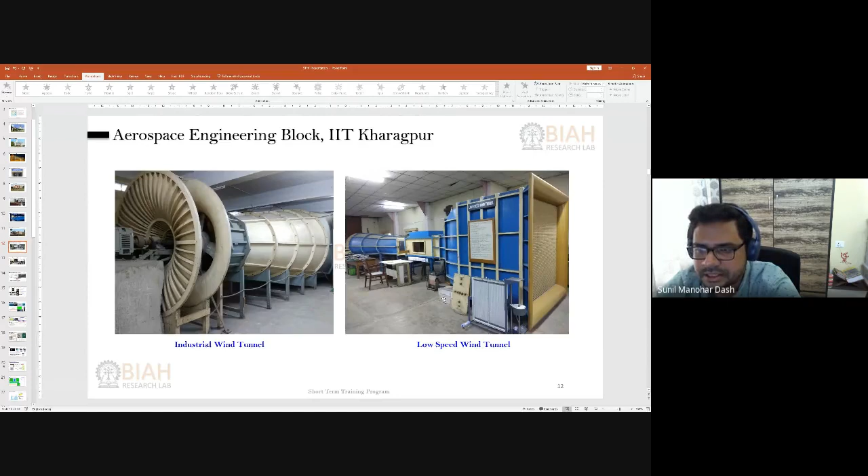Apart from that, we also have a low speed wind tunnel where we mostly carry out UG labs as well as a few low speed aerodynamic experiments. We also have a PIV setup to carry out experiments and flow visualization using the PIV technique - particle image velocimetry - where we try to visualize the flow field using laser technique.

We also have a high Mach number wind tunnel facility where we can observe supersonic flow, and this facility has been there for more than 30 years already. We do supersonic experiments and measurements on this.

My research team has recently developed this water tunnel facility in IIT Kharagpur, which can be used for various MAV and AUV applications - MAV being micro aerial vehicle and AUV being autonomous underwater vehicle. The tunnel facility itself is quite good, with turbulence intensity level less than 1.5% and uniformity more than 99.5%.

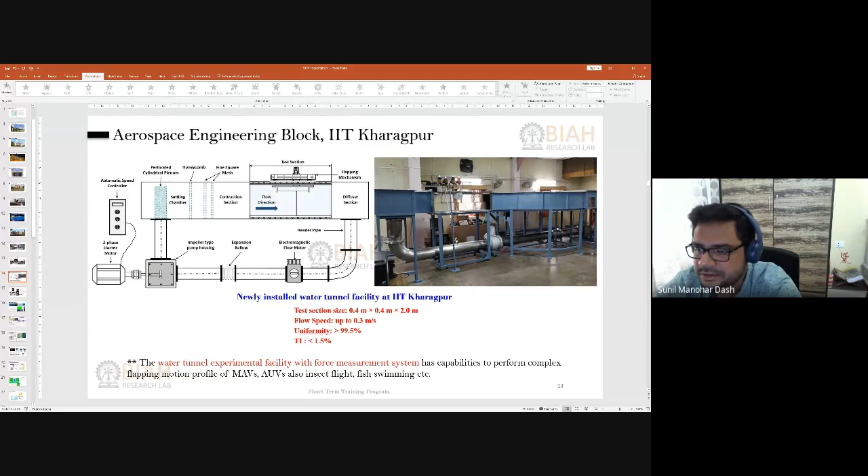We already have some experiments started here. This is a recent addition to the lab. And this is about the Bio-Inspired Aero Hydrodynamics research lab.

The principal investigator is here. We have several research students, PhD scholars, as well as master's and JRF students. We also have eminent professors as our research collaborators, like Professor Michael Triantafyllou from MIT, USA, Professor Pablo Valdivia from SUTD Singapore, and Professor Lua Kim Boon from NCTU Taiwan. There are a few more eminent professors currently working with our team.

So, the major thrust areas that we are working on.

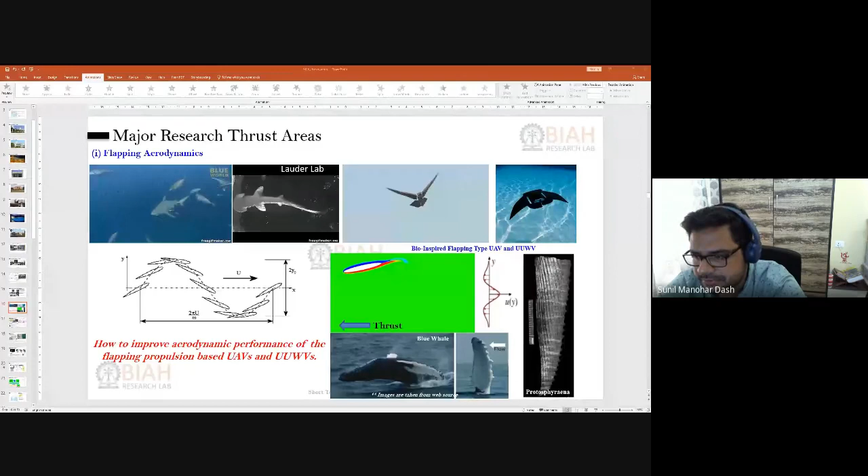One of the major thrust areas we are working on is flapping aerodynamics. We are looking at how we can develop autonomous underwater and aerial vehicles using bio-inspired principles, following the biomimetics of natural swimmers like different types of fish, and natural flyers like birds or insects. We are trying to develop different types of MAVs and UAVs using their locomotive principles, and find out how we can enhance propulsive performance by considering different aspects, such as different fin shapes and different perforations on the leading edge and trailing edge, to see whether they are beneficial to us or not. Those are the areas we are currently investigating.

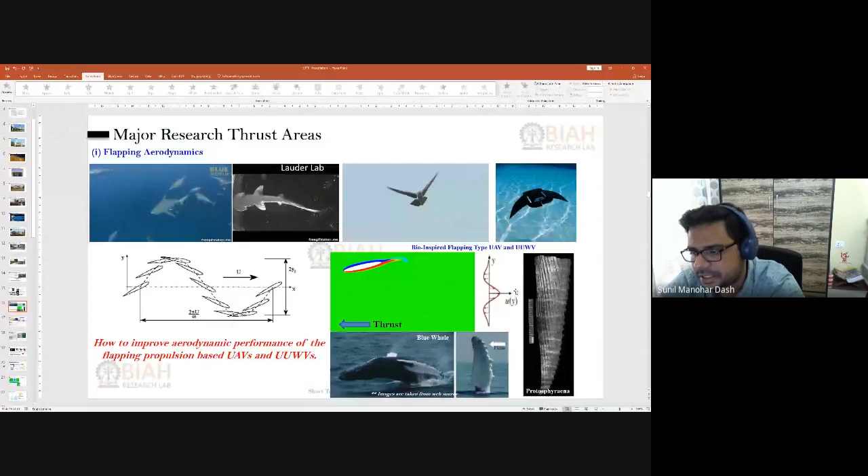Apart from that, our team is also looking into bluff body aerodynamics. As I mentioned, bluff body aerodynamics is one of the key areas that many professors are working on in the aerodynamics lab in the Department of Aerospace Engineering. Here we are looking at two main aspects. One is to characterize the flow physics behind different types of bluff bodies, starting from vehicle shapes like trucks or cars, through to traditional shapes like square cylinders and circular cylinders.

The second aspect we are looking at is how we can control this unsteady wake structure. You may already be aware that when there is vortex shedding behind a bluff object, it may lead to fluctuating forces, and due to this force fluctuation, the structure may vibrate. This is one example of vortex-induced interaction that previously led to a bridge collapse, which is already well known—most of you might have seen this video. This is the Tacoma bridge collapse, which happened due to unsteady flow patterns in the downstream.

So one area we are targeting is how we can avoid this unsteady flow pattern by providing various active and passive control measures. We are looking at different active control measures, such as compliant surfaces and moving compliant surfaces, as shown here, and also rotating cylinders. For these applications, we are considering both computational fluid dynamics and experimental fluid dynamics. Instead of going into the details of solver development, I am focusing on different aspects of the application of CFD that suit the current program.

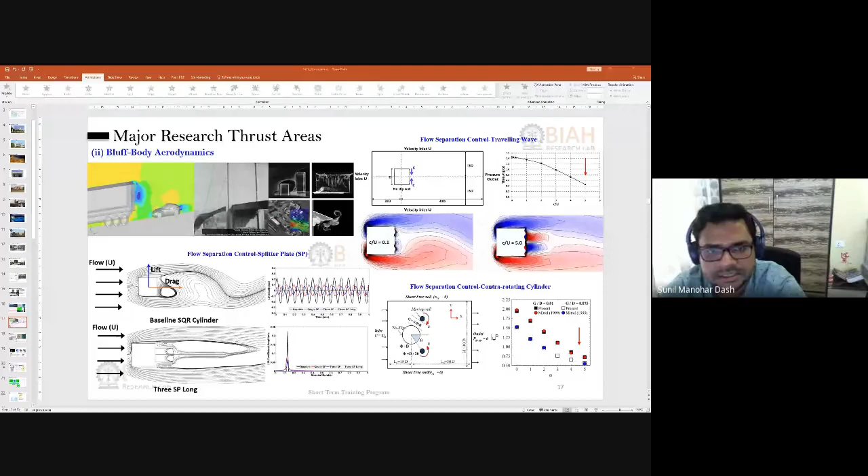So what is the uniqueness here? You can consider this simple problem statement. If we have the object moving...

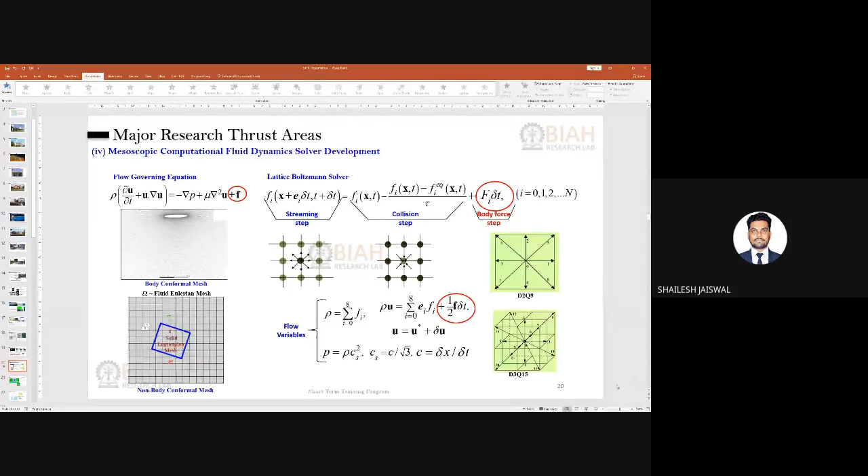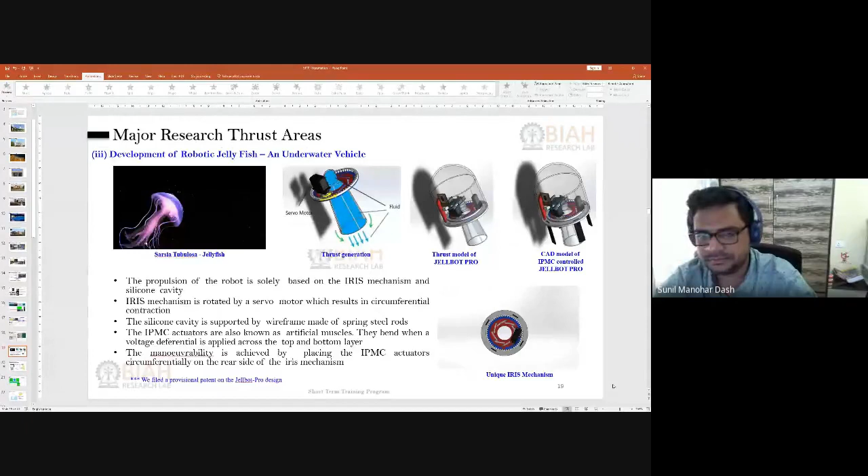So we are developing new CFD solvers. This is basically a mesoscopic solver. You must be knowing about Navier-Stokes solvers, which are macroscopic, where the continuum assumption is valid. In mesoscopic, also the continuum assumption is valid. But why are we developing this alternate solver? It has a specific advantage for moving boundary type problems.

For example, if I consider an object moving in a fluid domain, like this aerofoil oscillating in a domain, I need to change my mesh every time it moves. Because of that, all the results need to be projected to the new mesh at every time step, which is very time consuming and may require higher computational resources and time. To avoid that, we are developing an alternate solver where we fix the fluid domain and just move the solid domain, as shown here.

Instead of solving the Navier-Stokes equation, we solve a different particle-based equation called the Lattice Boltzmann equation, derived from the Boltzmann solver. Here we represent the fluid in terms of fluid particles, taking the average of the fluid particle density, defined as F, and we try to see their streaming as well as collision.

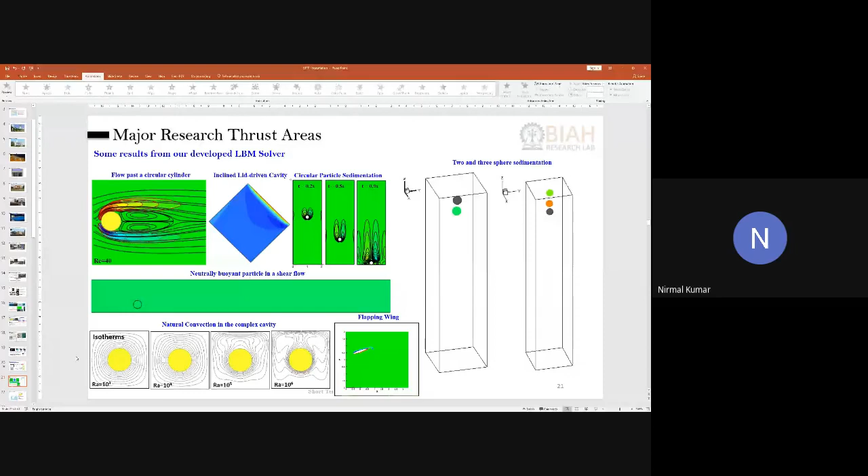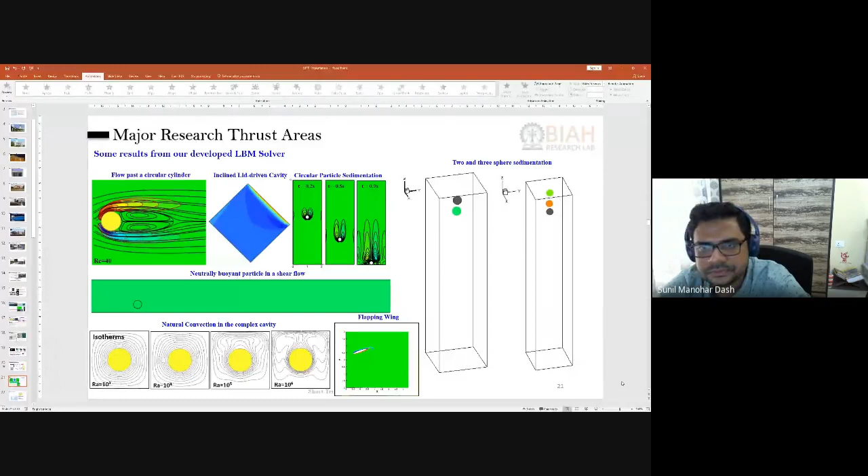So these are some of the results, properly validated with the previous data.

Now coming to the present talk, which is on the investigation of the propulsive performance of 2D flapping aerofoil. Let me give you a brief idea why we need this particular study, and what is the motivation behind us carrying out this research. You can see that on the Indian map, the Indian coastline is spread across more than 7,500 kilometers.

You can see that it's a quite large coastline. So in order to claim and hold and utilize the ocean properly, and for security reasons as well as condition monitoring in this particular area, we need highly efficient autonomous underwater vehicles.

There are various autonomous underwater vehicles already designed, but what we are looking for is how we can improve performance in terms of efficiency, and whether we can provide any new way of designing underwater vehicles based on the investigation or data we obtain. That is our objective behind this particular study.

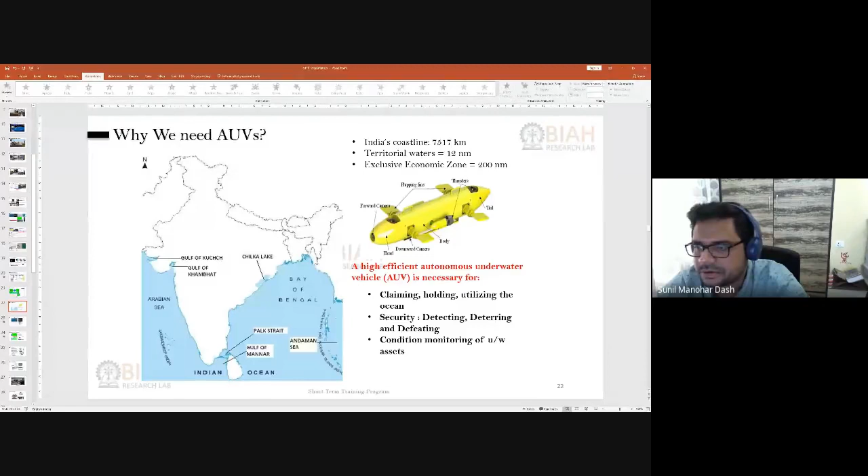As I have mentioned, the design of the underwater vehicle is inspired from fish. For example, here you can see the GIF file, showing two fish: one is a shark and the other is a hammerhead shark. They actually achieve propulsion based on flapping of their tail fin.

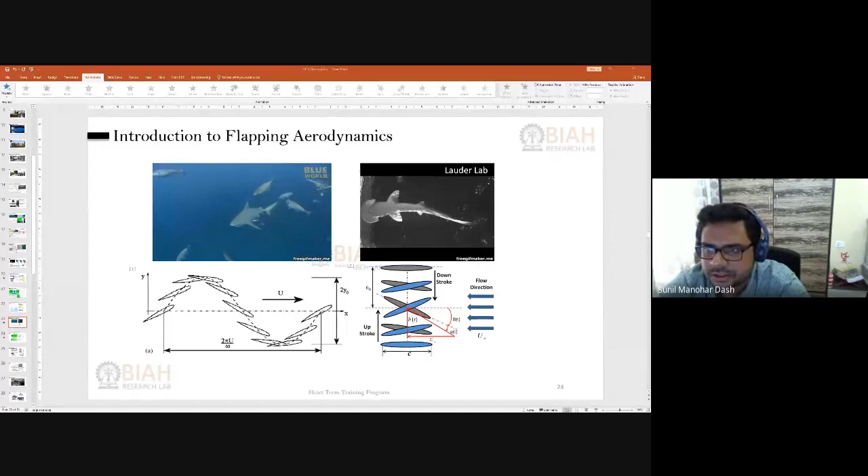This flapping of the tail fin can be seen in a sinusoidal manner, as shown here. If I take a cross section of their tail fin, it will actually look like this - basically a form of an aerofoil section. As it moves forward during swimming, it will also have some angle to the direction of its motion, as well as propagating in a sinusoidal manner.

If I change the frame of reference to a stationary frame, I can fix the location and simply oscillate the wing with some angle. So it is oscillating and having some angles, and these two types of motion are considered as heaving and pitching motion. When the aerofoil is pitching at a certain angle, that is called pitching motion. This simple vertical motion is called heaving motion.

We are investigating this in this particular study. I will just talk about this two-dimensional aspect of heaving and pitching motion of this aerofoil.

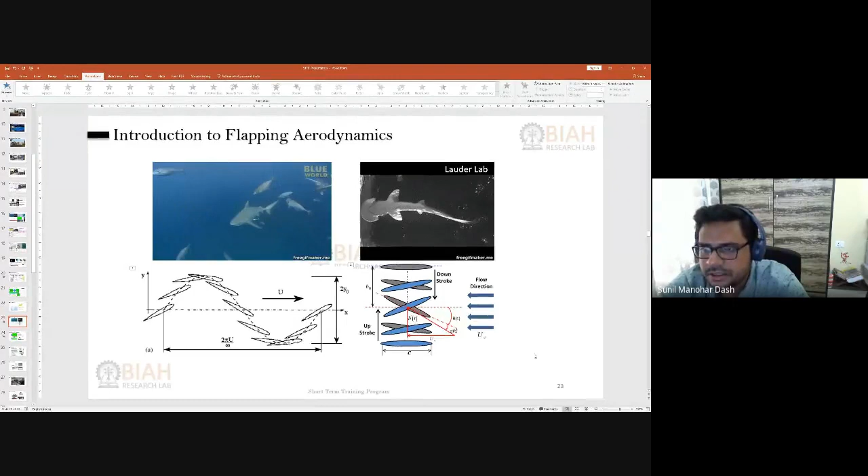Now coming to why the aerofoil generates thrust - I have considered two different objects here. One is an elliptic aerofoil, and one is a circular cylinder. If I go to full screen, you can see that this elliptic aerofoil produces a vortex street, which is a reverse Kármán vortex street.

If I do averaging in the wake region, it will give me a momentum excess type of velocity profile, and this momentum excess velocity profile will generate a jet-like structure. So on average, there will be a jet-like structure behind the aerofoil, and due to the action of this jet, the aerofoil gets a reactive force that propels it in the forward direction.

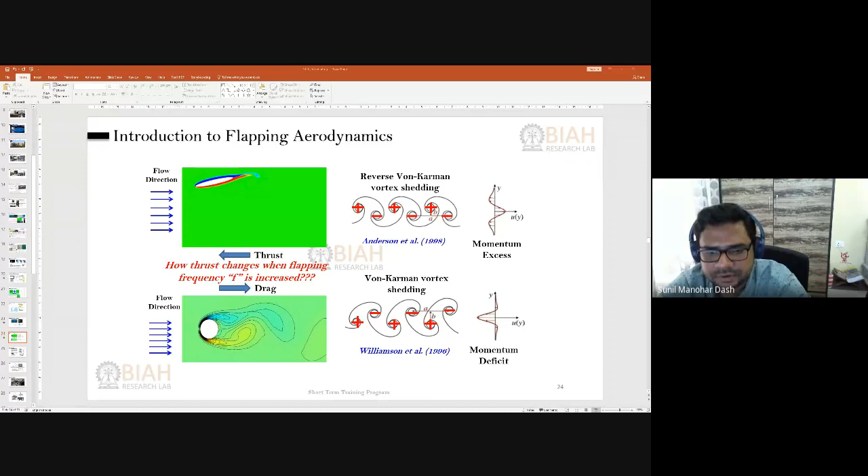That leads to thrust generation on the aerofoil. This is different from the conventional type of vortex street, which is the von Kármán vortex street, where you see drag-producing kind of nature. The significant difference between the vortex streets is shown here - this is reverse von Kármán, and this is the von Kármán.

If I take an average of the velocity profile in the wake region, you can see it will form a momentum deficit kind of situation, and because of that, the whole cylinder will be dragged into the wake, producing drag on the cylinder. Whereas in the other case, there will be thrust, so the aerofoil moves forward against the direction of the flow, but this will be drag. So that is the basic principle behind how propulsion can be generated using a flapping aerofoil.

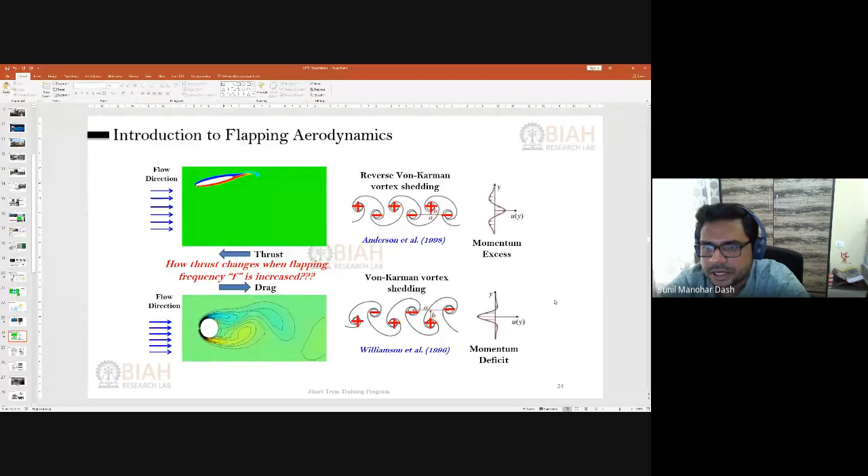Now coming to the problem statement - what we are trying to investigate here is how the propulsion performance can be improved if we consider different parameters, like various angles of attack and various propulsive performance based on different flapping frequencies. I have mentioned the flapping frequency in a non-dimensional form - the Strouhal number. If I vary it from 0.1 to 0.8, how does the propulsion performance change?

The Reynolds number in this particular study we have kept as 5000, because in this range mostly you see that MAVs and UAVs operate. And here we are considering the aerofoil movement.

The movement is in a sinusoidal manner - this is sinusoidal heaving, and this is sinusoidal pitching, which is also sinusoidal. This gives the effective angle of attack, since the aerofoil is moving in the vertical direction and there is an incoming flow, resulting in a resultant velocity, and the resultant angle is called the effective angle of attack. We keep the maximum effective angle of attack as 10, 15, and 20 degrees.

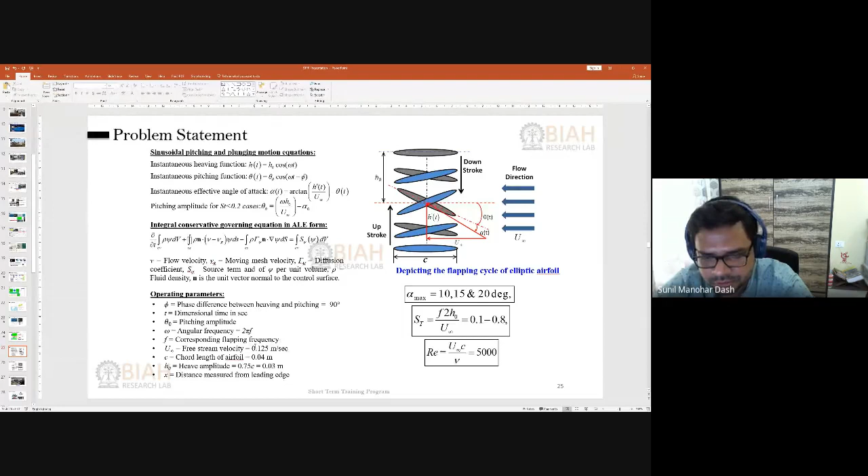We are going to solve this problem using a commercial solver - here we have used ANSYS Fluent, and in ALE formulation we are going to solve this one. These are a few parameters that we have set, though not so important at this stage.

Coming to the research methodology, we have divided the whole computational domain. We have taken an O-type computational domain - this is our inlet side, velocity inlet, the outlet is pressure outlet, and we have an interior domain with two interfaces defined which slide over each other. The inner domain slides over the outer domain, and also moves vertically as well as rotates.

If I show you the mesh motion, it will be like this. The boundary condition we have used is no slip on the surface of the aerofoil, and we have generated a structured mesh around the aerofoil using the dynamic mesh technique.

There are a few dynamic mesh parameters also we need to input in the Fluent solver, and we have written our own in-house UDF to generate this particular type of flapping motion, heaving and pitching motion.

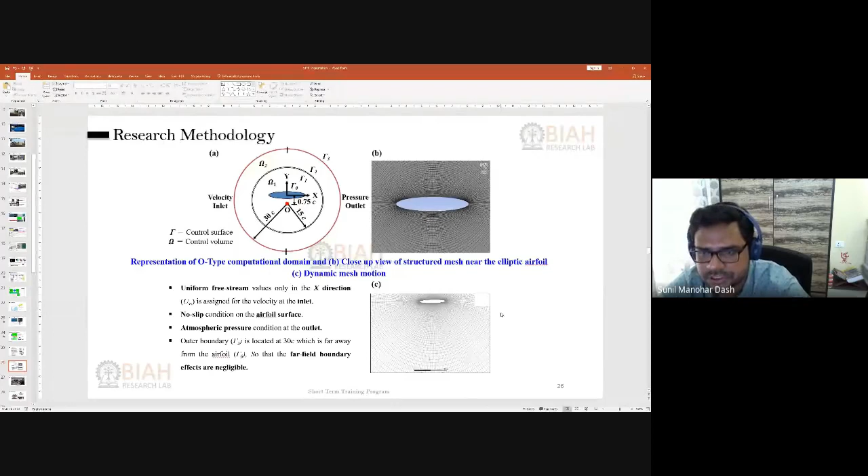For the experiment, we have conducted it in the water tunnel facilities, and you can see here it's an integrated system. The mechanism is set here, and we can control both flapping motions through this integrated system.

Now coming to this particular mechanism, which mimics the motion I described on the computational part - the exact thing can be repeated or replicated in this particular flapping mechanism.

You can see here in GIF form the real life images and video taken from our setup. This is your single wing flapping, and we also have two wings here in a tandem arrangement, which you can see both oscillating as well as making an angle at the same time.

So heaving and pitching - we have developed this particular force sensor here, in-house, with a 4-bar bending mechanism. The details you can find out from our publications.

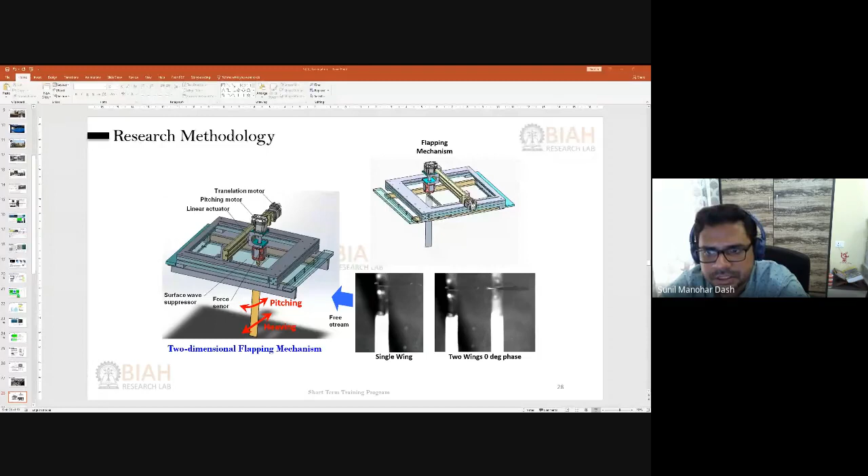Another uniqueness about our work is using the PIV, or particle image velocimetry technique, to visualize and measure the flow field. Here, we take 2 images simultaneously and try to correlate using different correlation principles, cross correlation principles to be particular.

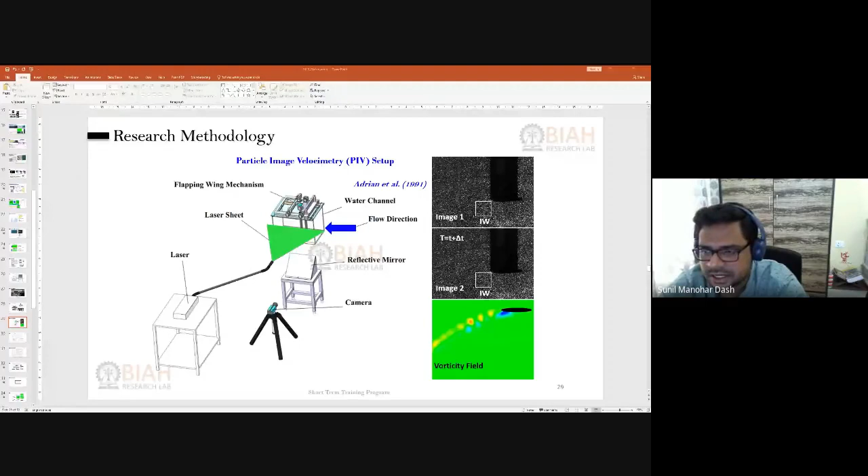Then we obtain the vorticity field, as you can see here, and we compare whether the same vorticity field is seen in the numerical simulation or not, since whatever we get in the experiment is real and happening in the actual scenario. So whether the computational technique is correct or not needs to be validated - this is the second stage of validation. We validate with the force data as well as the flow physics, because we are very particular about whether the data we are obtaining is correct. That's why we perform this PIV analysis as well.

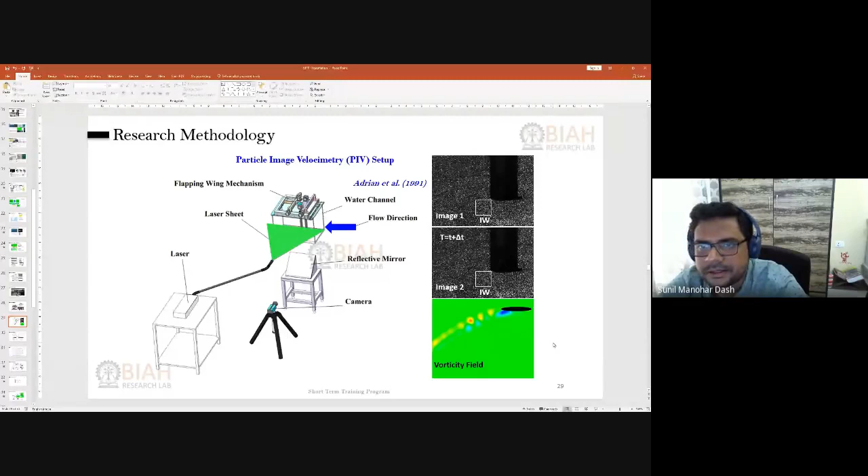Then this is about the validation of the solver. As I said, we obtain the force using the force sensor, and this is for a Reynolds number around 5000 and flapping frequency of 0.3 Strouhal number. So we get force data like this - this is transient force data. Over a flapping cycle from 0 to 1, you can see that in one flapping cycle we get a peak here and another peak here.

So this is your upstroke and downstroke side. I will come to that upstroke and downstroke.

What you see here is that our CFD data matches quite well with the previous publication, both CFD and experiments. This is the mesh independency test, where we obtained proper mesh independency. The errors keep reducing as you increase the mesh size, and we followed M4 for our investigation to carry out the subsequent simulations. We have used this M4 mesh size.

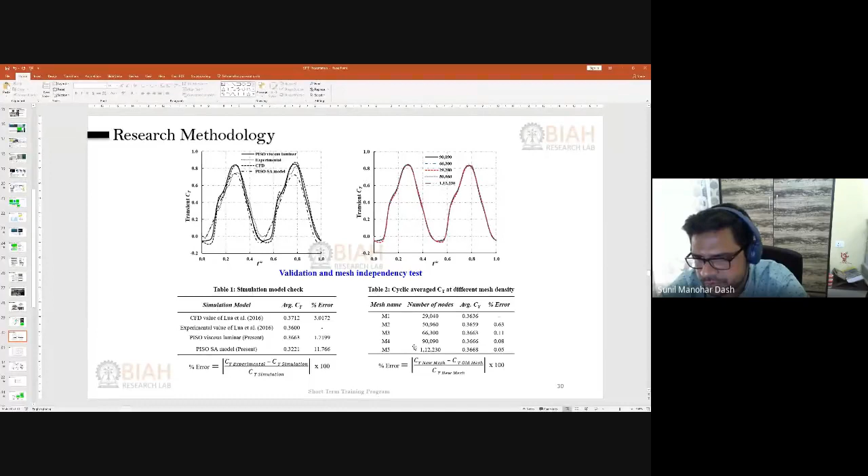Now, what are the heaving and pitching profiles that we followed in order to keep the effective angle of attack profile constant, or the maximum effective angle of attack constant? We have used a sinusoidal heaving profile, which you can see is kept constant. Heaving means just the oscillation of the aerofoil, and the pitching profile changes as I increase the flapping frequency.

This is the non-dimensional flapping frequency, or Strouhal number. You can see that as the Strouhal number increases, the pitching profile or pitching amplitude also gets modified. This modification happens because of the definition of the effective angle of attack, as you have seen earlier. So when I try to fix the effective angle of attack at 10 degrees, I need to change the pitching amplitude, and you can see that the higher the flapping frequency, the higher my pitching amplitude will be.

So I want to point out: if I am increasing the pitching amplitude, the aerofoil needs to rotate at a faster pace. At a non-dimensional time scale of 0 to 1, I have a larger pitching amplitude for larger flapping frequency. That means my aerofoil needs to cover this high angle and come back to that same zero angle during downstroke itself, so it has a higher rate of rotation. We saw that this rate of rotation has a detrimental effect on the thrust performance of the aerofoil, or on the performance when designing an underwater vehicle using this flapping-based propulsion technique. So this higher rate of rotation can be detrimental, and you need to be very careful when you design it.

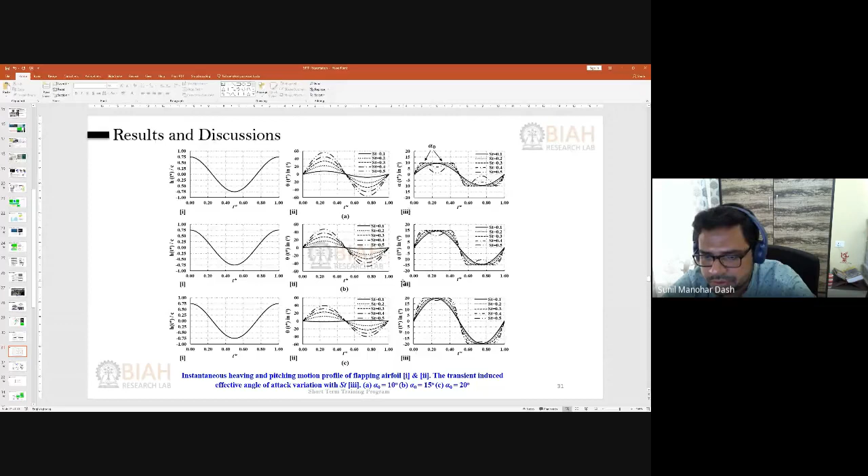Coming to this particular slide, you can see the thrust performance and how it varies with the Strouhal number or non-dimensional flapping frequency, plotted for different angles of attack: 10 degree, 15 degree, and 20 degree, with both CFD and experimental data shown. You can see that when I increase the flapping frequency for any particular angle, say 10 degree angle of attack, the thrust performance increases up to a certain Strouhal number, then it reduces. The same happens for all the other angles of attack as well. So it increases up to a critical value, then reduces. That critical value is defined here as STC.

This is the time-averaged thrust performance. When you look at the transient profile, we have actually derived the time average information from it. So in order to investigate in detail what is happening in the time average, we came down one stage before and investigated the transient profile here. The first half, 0 to 0.5, is your downstroke, and the next half, 0.5 to 1, is the upstroke. Downstroke means the aerofoil is coming down, upstroke means the aerofoil is going up.

You can see that in all the cases, the downstroke and upstroke are symmetric, so instead of discussing results for both, we limit our discussion to downstroke alone. Another thing you can see is that as I increase the Strouhal number or non-dimensional flapping frequency, the transient CT profile changes, and this change leads to different time average values. At the lower flapping frequency range, around 0.2 or 0.3, we see a type 1 transient CT profile, where you just see a parabola.

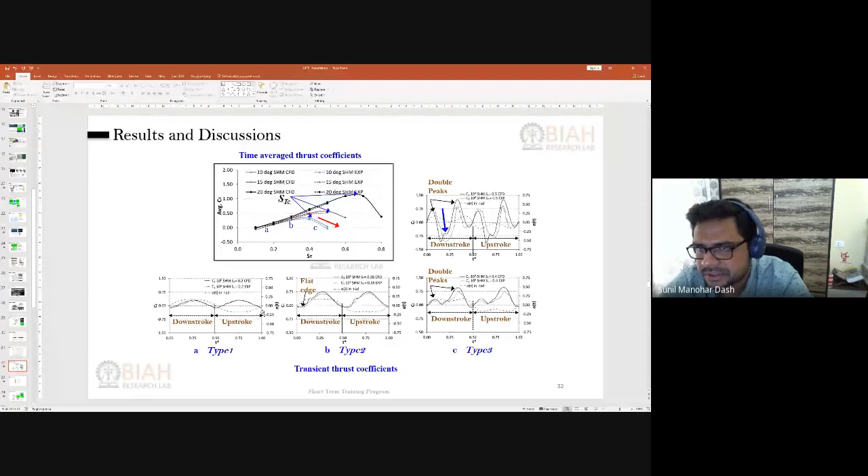So we try to investigate what is actually happening. Now we know that on a force profile, time average thrust is reducing, transient CT is also getting changed. What is happening in the flow physics? That is our next concern, why this transient CT is actually appearing. So I'll go through the details of the flow structures, what is actually happening in different transient CT regimes.

Let's first consider the type 1 profile. As you can see here, it's a smooth parabola. Whatever data I'm going to show now, it's already at a periodic state condition, not at the beginning, it's already in the 10th flapping cycle, so you can say this periodicity has already been established. At the beginning, I have marked a few points from 1 to 6, you can see here.

At point 1, you can see there is a leading edge vortex which was generated in the previous cycle, in the previous upstroke. This leading edge vortex was generated, so that's why I named it RLEV, and that RLEV is still there, still present at the trailing edge of the aerofoil. Because of that, you see a negative thrust or a drag at the beginning of the stroke, since this RLEV has a suction effect which will produce drag on the aerofoil. That's why it's showing a negative value here, but slightly negative since it is about to shed.

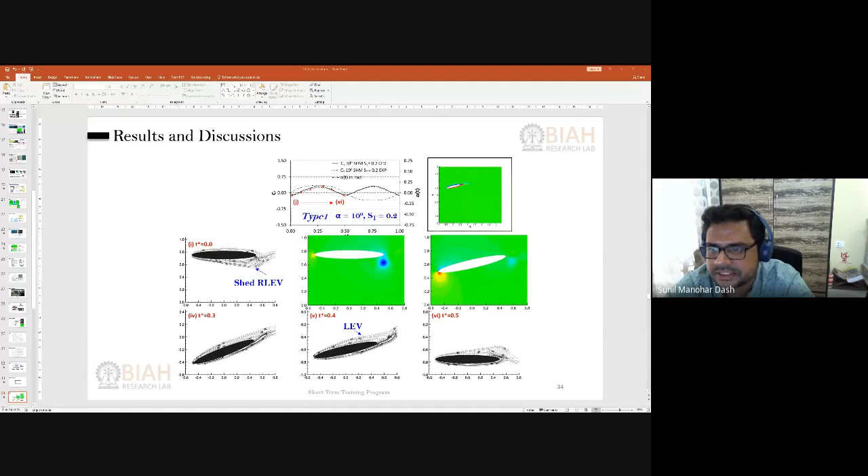After that, when the RLEV sheds completely and the LEV is formed on the aerofoil surface, then the transiency value starts to increase, and this increment continues with the increase in the strength of the LEV. The LEV will continue to increase its strength and spread across the aerofoil, so the transiency values keep increasing, and it attains a peak near the mid of the downstroke or mid of the upstroke. Since they are symmetric, let's just talk about the downstroke itself.

So it attains a peak here, then afterwards it reduces. This reduction happened because the LEV has shifted to the other side of the aerofoil, to the second half of the upper surface, where it starts to produce drag, or a reduction in thrust. That's why you see a reduced thrust value, and simultaneously the aerofoil is also reducing its pitching angle and preparing for the upstroke. That's why this downward transiency is seen here. So this is the explanation behind the parabolic type profile.

Coming to B, the intermediate Strouhal number, where we saw the parabola profile has an additional attachment at the beginning, a flat edge type formation. Here also we see presence of the previous stroke leading edge vortex, RLEV, but at the same time we start to see formation of the present stroke LEV. The competition between the present stroke LEV and the previous stroke RLEV, they try to nullify each other, or cancel out each other's effect, and by that it follows a smooth or flat edge type of transiency profile here.

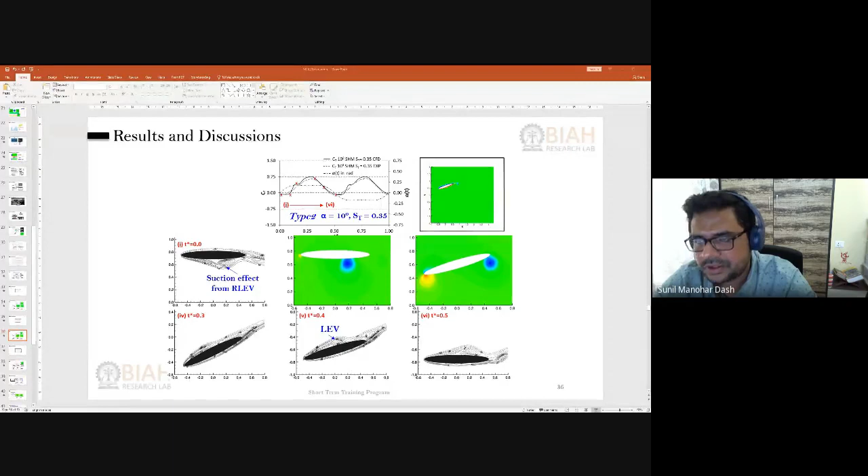As the aerofoil continues its downstroke, the RLEV starts to shed, and because of that, only the effect of the present stroke LEV is seen, which continues to increase with the downstroke as time proceeds, and it will attain a peak. Afterwards, the transiency will reduce because the LEV will be shifted to the other half of the upper surface of the aerofoil, which is already explained in the type 1 profile. So this is what we have considered as type 2 profile.

Now coming to the thrust deteriorating type, which is type C, where we saw that at this particular flapping frequency or Strouhal number, there is no positive or significant thrust. Actually, the thrust has reduced. Something similar you can correlate if you know about stall on an aerofoil or conventional aircraft: after a certain angle of attack, the lift reduces. Similarly, beyond a certain critical Strouhal number, the thrust performance of the aerofoil is reducing. So we try to see what is happening here in C.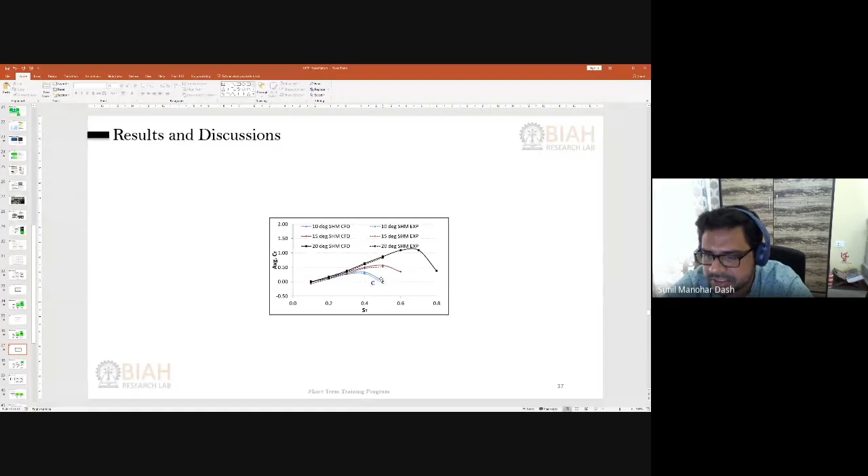There is also simultaneous formation of a LEV. Because of that, you start to see a straight increase in the transiency profile from the very beginning of the downstroke, which is very different from the previous two types we discussed. So because of the combined effect of the LEV and the induced velocity effect of the counter rotating vortex pair, we start to see a positive rise in the transiency value.

Now as we proceed in the downstroke, this induced velocity effect is suppressed, or totally neglected afterwards, because the location of this induced velocity moves as the RLEV structure moves on the lower surface of the aerofoil. As the aerofoil continues in the downstroke, this RLEV moves further into the wake, and there won't be any counter-rotating vortex pair or induced velocity effect, but there will be only a suction effect.

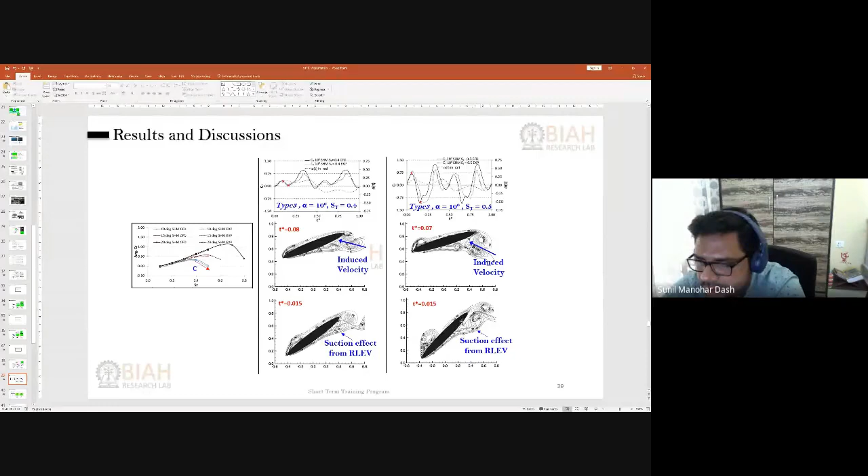So in the downstroke itself, there is no previous stroke to it. At the very first stroke, we don't see the effect of RLEV. So we removed the effect of RLEV and tried to see how the profiles look.

Here I have shown a comparison between two Strouhal numbers, for the very first flapping cycle—that is, the first downstroke.

In the first downstroke also, we saw a negative type of valley region in both Strouhal number 0.4 and 0.5, which was quite surprising to us. There is no effect of RLEV, but there is still a drag producing valley region.

To further look into that, we found there is a significant low pressure region developed under the aerofoil due to a higher rotation of the aerofoil at higher flapping frequency.

As I already said, in non-dimensional time scale, the pitching amplitude increases significantly. So to attain that larger pitching amplitude, the aerofoil needs to rotate significantly. Due to this higher rotation, thinking from Newton's law, it will develop a low pressure region under the aerofoil.

The range and expanse of this low pressure region under the aerofoil increases with flapping frequency. This is the main cause of the thrust reduction on a transient scale, and if I do a time average, I will of course get a reduction in the time average value as well.

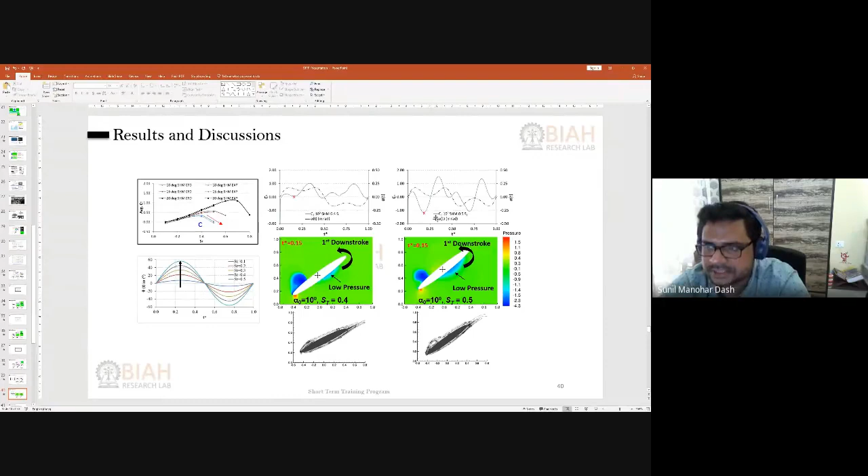So after knowing the causes for the reduction in propulsive performance at high flapping frequency, I have summarized: the drag producing valley region, the low pressure region, and partly the RLEV—these three effects contribute to the reduction in time average thrust as well as the transient valley formation.

Now, if I want to increase this propulsive performance, like now we understood what is happening at a high flapping frequency, but how can we further improve the propulsive performance? Is there any way we can increase it?

Our next task objective was to improve the propulsive performance at higher flapping frequency, like these arrows I have shown here. We looked into one of the previous articles by Hover, who showed that by modifying angle of attack, the thrust behavior may be affected for the aerofoil, but the detailed investigation was not thorough. There was not much information about the flow structure and why we were supposed to follow such an effective angle of attack profile in the first place. So we thought of investigating from that aspect and try to provide an alternate solution.

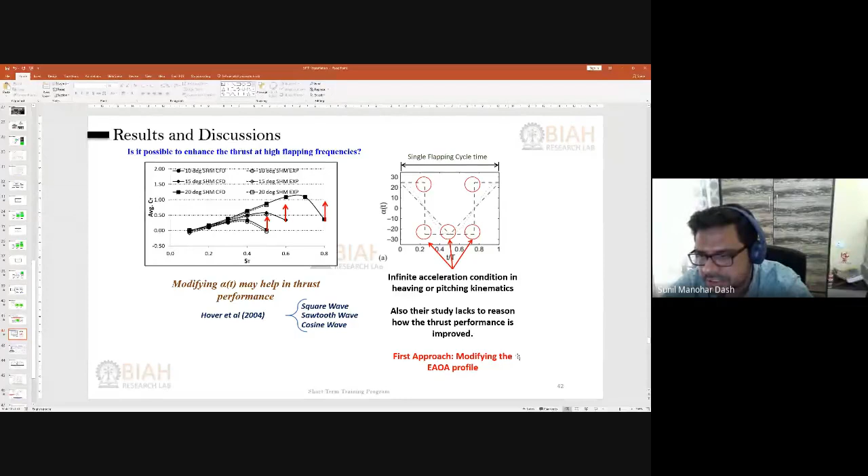So the very first question we pose is: is it possible to enhance the thrust at high flapping frequency? If yes, then how do you do it? So we start with the first approach by modifying the effective angle of attack profile. Previously our effective angle of attack profile looked like a sinusoidal one. Now we try to modify it to an alternate profile, like you have seen here.

Basically, we have adopted two different profiles. One is sinusoidal type, and both can be considered as a smooth trapezoidal profile because it has a base length and two heights also, so a part of a trapezoid. So we named it a smooth trapezoid profile. One follows the sinusoidal type, the other follows the elliptical type for the legs.

And what is so special about following these two types of effective angle profile? The aim is to reduce the rotation effect. As I discussed previously, the rotation effect is the main source for the thrust reduction. If you can somehow delay that rotation effect, or somehow totally remove it, then we may get some benefit in the thrust performance.

So that is what we checked: the rate of rotation of the aerofoil for these two types of profile at the same Strouhal number, which is 0.4 or 0.5, for the sinusoidal effective angle of attack and our modified version. You can see a region here where there is a sharp reduction in the rate of aerofoil rotation. This amount of reduction is sufficient to generate a good increase in the propulsive performance. I'll come to that subsequently.

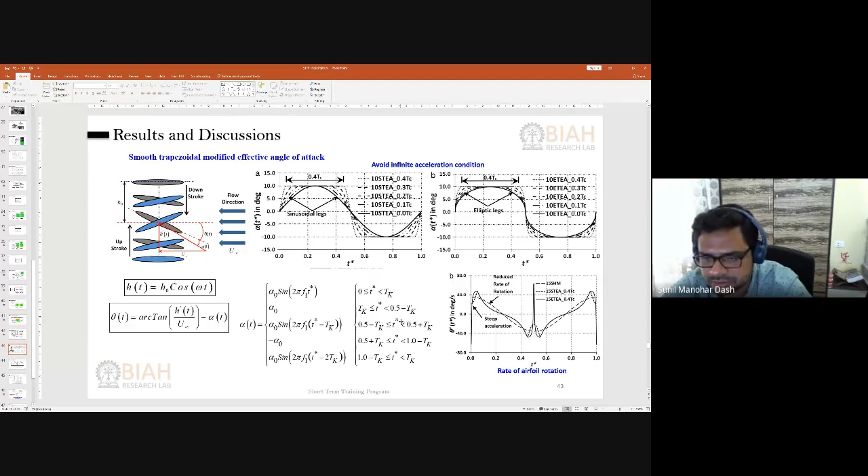So detailed equations you can find in our publication. I will not go through the formulations here. Yes, so this is what we have seen, which is quite encouraging.

The dotted line is for our previous investigation, where we considered a 15-degree angle of attack. You can see that it sharply reduces with increase in the Strouhal number. But for the modified profile, we can delay the thrust reduction. And also, we can actually increase the thrust performance at the higher flapping frequency, particularly for the elliptical type of profile.

Now we know how to increase thrust, basically by reducing the rate of rotation of the aerofoil, by defining an effective angle of attack profile such that its rate of rotation reduces significantly at high flapping frequency. Then we can get a thrust enhancement. This work was published in 2018; you can look into it if interested. Yes, so this was our first approach.

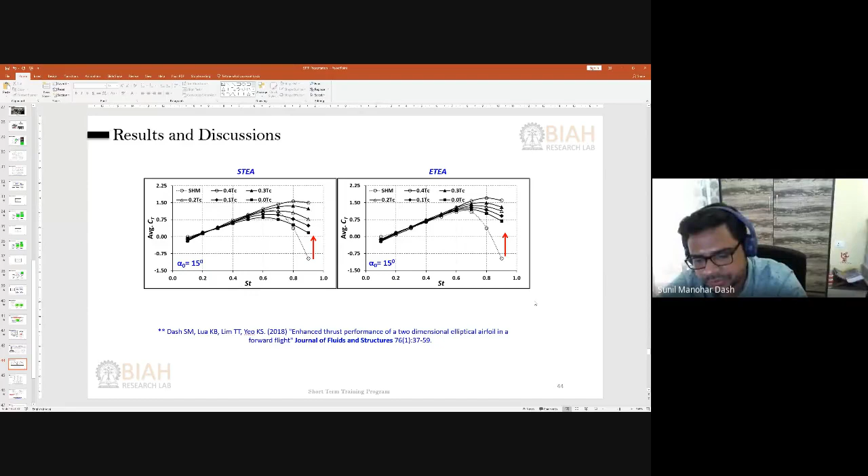The second approach, what we recently worked on, is to find an alternate measure by following the same sinusoidal effective angle of attack profile, but modifying the pitching center on the aerofoil itself. Previously we studied the pitching and flapping, heaving and pitching happening on the pivot location B. Now if we shift our pivot location to A, towards the leading edge side, or C, towards the trailing edge side, while following the same sinusoidal effective angle of attack profile, which you have already seen previously, we are retaining the same profile but modifying the pivot location.

So by that, what we are trying to do is shift the rotation-induced effects on the aerofoil to different locations.

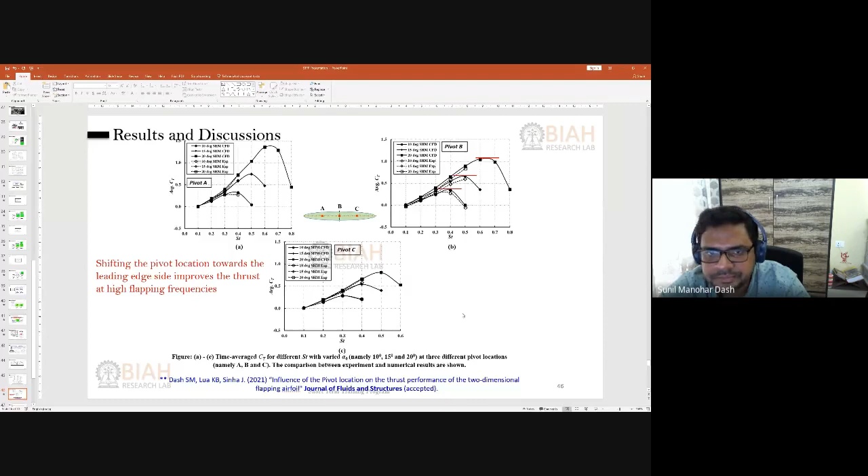To conclude from the present talk: the propulsive performance of the aerofoil is not the same at different flapping frequencies. With the increase in flapping frequency, the propulsive performance gets modified - it increases up to a critical Strouhal number, and beyond that it reduces, and the rate of reduction depends on different flow features, like whether there is an LEV, a TEV, or a counter-rotating vortex, depending on the flow structure.

Depending on the flow structure as well as the rotation-induced effect, at higher flapping frequency the rotation-induced effects are significant and adverse - they are not favorable. This leads to thrust reduction at higher flapping frequency.

There are two ways we can improve the propulsive performance: one is by modifying the effective angular profile, and the other is by changing the pivot location. If we shift the pivot location from the midpoint towards the leading edge side, it seems to be beneficial in terms of propulsive performance.